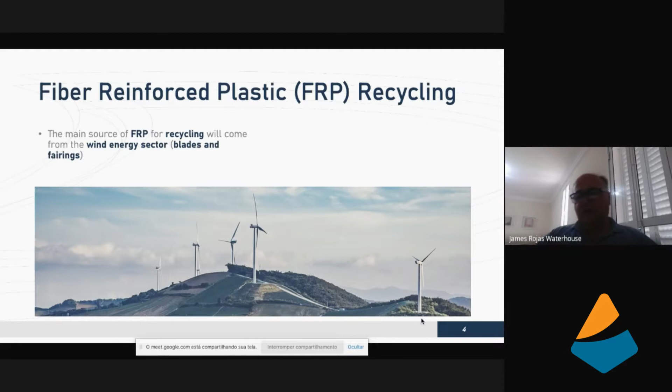The main concentrated source of composite materials to be recycled comes from wind energy, especially the blades and the fairings. But what about all the composite materials used in our society, especially on new aircraft? Well, the aircraft are pretty new, so they don't need to be recycled yet. All the other composite uses come from several thousands of products spread around, and they're not concentrated. Most of our society does not have a way to segregate composite materials to be recycled. So if you have a few kilos of composites, that's not commercially viable to recycle.

So most of our composite components go into domestic or industrial garbage and go to the landfill at this moment. That's quite a shame, but anyway, there's a great future for that. For wind generators, things are quite different, because the wind generator's lifespan is less than 20 years. We expect 20 years of life, but most wind generators do not reach the actual 20 years lifespan, mainly because of early blade failures, etc. But we can consider a 20 year lifespan.

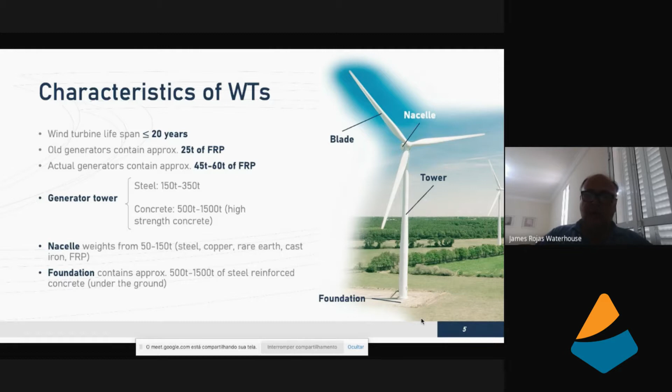So what does that mean? That means after some time, we need to decommission the whole thing. We just cannot leave the wind generator after 20 years just as it is, because it imposes a high risk for society, because it will eventually fall down and create a huge risk for human life or animal lives all around. So you need to disassemble it.

And to disassemble it, you need a huge crane capable of 90 meters height or maybe more, and with a huge capacity. A crane like that, if used for the whole wind farm decommission, you can share the fixed cost of the crane between all the machines that need to be decommissioned. That means around $10,000 up to $30,000 if you are using it for a whole farm.

If you need to decommission in isolation, then there will be a huge cost, because a crane like that needs around 10 days, using like 15 trucks and 10 people just to be assembled. It's an enormous cost. So just getting the wind generator down is a labor-intensive activity, and also a respectable risk activity, because it weighs a lot and you have a lot of risks for human life all around.

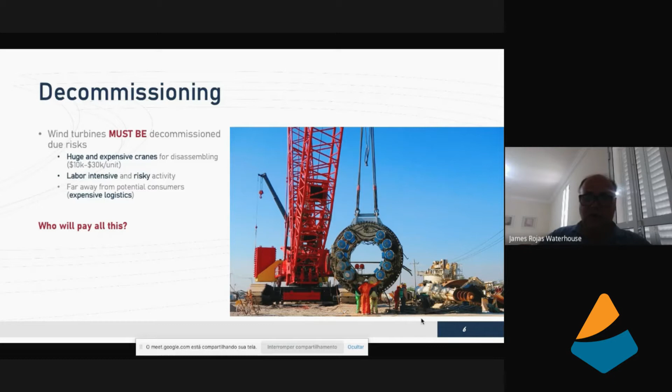For the new contracts, most of the countries are requesting from the investors a warranty to decommission the whole thing. But just for the new contracts; for old contracts, most of the machines are not covered. So there will be problems around. And how can we recover part of this cost of decommissioning the whole machine? Well, we can try to recycle the materials the wind generator contains.

So we can sell the steel for around 15 cents of a dollar per kilo. That means between 20 up to $50,000 for the tower itself, plus between 7 and 20,000 for the nacelle itself. That means we have around 27 up to $70,000 of recovered money. That's not even close to paying the whole expenses for decommissioning the whole thing.

Just because we have the concrete. If we don't have a concrete tower, we sure have a concrete foundation. For the tower itself, which has a bit lower cost, we're gonna have a huge problem, because the tower is composed of high-strength concrete. And trying to break down high-strength concrete into small pieces requires a quite powerful hydraulic jaw fragmenter that's not very cheap to operate. So the whole thing costs around $30 per ton just to fragment it,

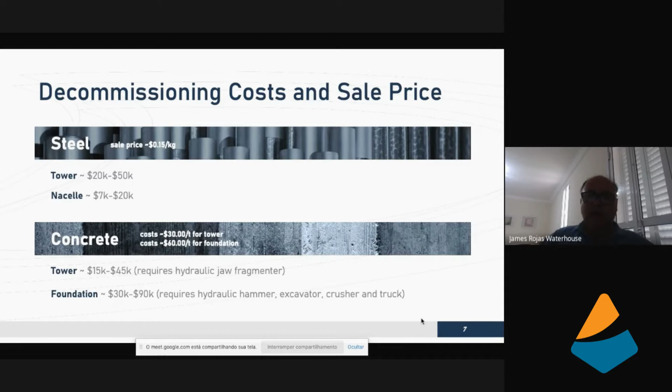And what's gonna happen with the composite materials, mainly the blade materials? This could be a game changer for the whole thing. Now, what they are doing with it is putting it into a shredder to fragment it into small pieces, just because composite materials are very light.

So it's light. If I do not fragment it into small pieces, the logistic cost will be much more expensive than the actual cost. That's still expensive. So you need to improve the density.

And the default use right now is just a landfill that will cost you around $20 per ton. It depends on each country; each region has different landfill costs. But this is not the way to do things for the future generation, just to bury the problem.

And also, most of the landfills are hundreds and hundreds of kilometers away from the blades. So the logistics costs, again, are gonna be very expensive. So in Europe, where the problem is happening right now, just because Europe was the first part of the world starting with wind generators, they are using a lot of composite to fuel cement furnaces.

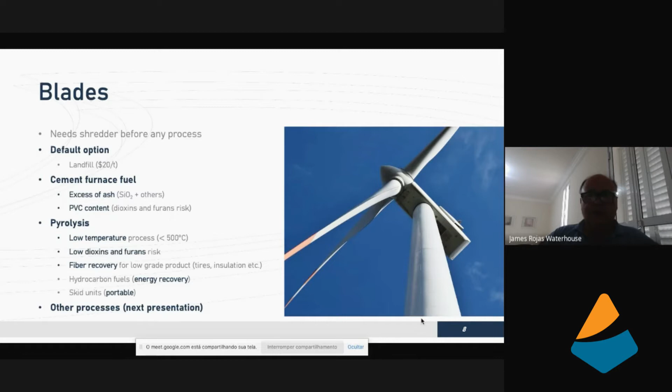And then we have other processes I won't talk about, just because Vanessa will focus on those processes. And this is more or less what I have prepared for you, just because I have only 20 minutes.

I'm going to talk about PHYre, a new recycling technology for the recycling of carbon fiber reinforced plastics. And I'm going to start by talking about Extracthive, because Extracthive is a French SME dedicated to the circular economy. We are mainly specialized in the production of secondary raw materials, and we decided to specialize in this production mainly because we can decrease the risk of supply of this material in Europe. We can give a material with a low carbon footprint, which is especially interesting for local production and local sourcing, and also the affordability of this second-life material, because we have a low price and wastes that can be sourced easily.

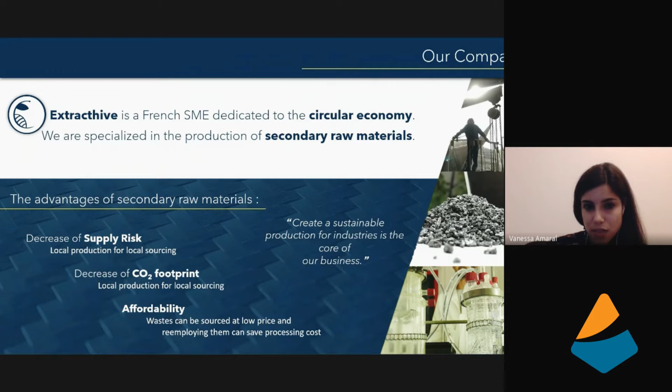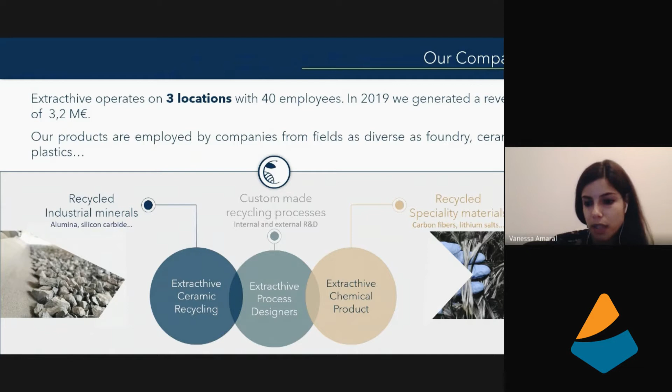So to get into the subject of today's webinar, I'm going to start talking a little bit about life cycle analysis. Today, especially in Europe, there is a lot of legislation and regulation limiting the CO2 that can be emitted by cars and all transportation. For example, if we have a car that is 30% lighter, we have a reduction of 50 tons of carbon per ton of carbon fiber in 10 years. If you consider aircraft, if they are 20% lighter, you're going to have a reduction of 1,400 tons of carbon per ton of carbon fiber in 10 years. So it's a huge decrease in emissions, and it's very interesting to lighten transport. However, the production of carbon fibers is very energy-intensive and can emit up to 80 tons of carbon per ton of carbon fiber produced, which is huge.

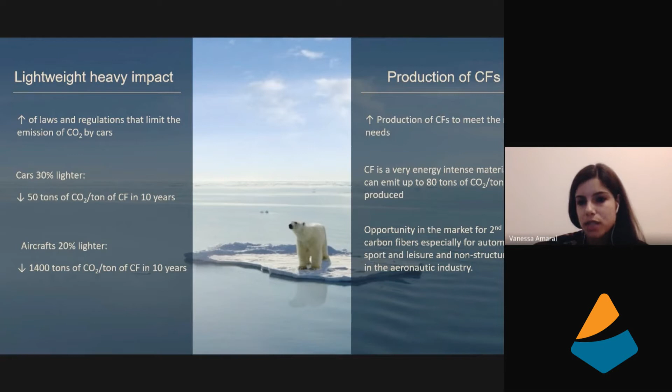However, this production is increasing because the market is in need of this carbon fiber in order to go for lightweight. And all this demand for carbon fibers and all this lightweight that we are looking for does show that there's an opportunity finally for second life carbon fibers, especially for automotive, sport and leisure, and non-structural parts in the aeronautic industry.

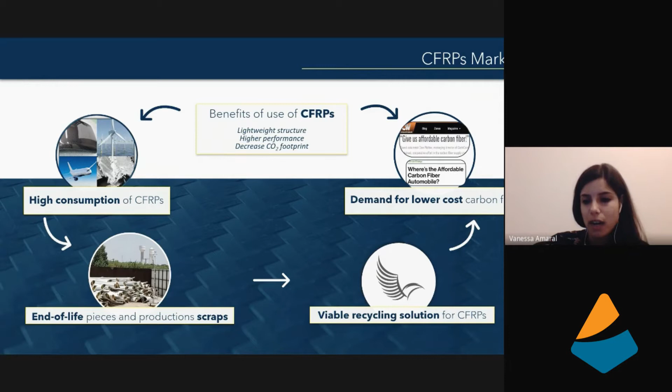So just to resume, we have today a high consumption of composite material based on carbon fibers. So we have a lot of end-of-life pieces and a lot of production scraps being generated today. We need to find viable recycling solutions in order to answer the need of the market for lower cost carbon fibers, and mainly a carbon fiber that has a lower carbon footprint. So that's how PHYre was born.

Actually, today the main recycling process for this kind of material is pyrolysis, as Professor James just presented. However, pyrolysis does still have quite a high carbon footprint, especially because of the high temperatures that they use, and they can damage the fibers a little bit as well. So we have limited capacity of using this carbon fiber, especially in high value materials afterwards. So the PHYre process was born in order to have a very high quality material without damaging the carbon fibers that can be used in high value applications.

So mainly we're going to collect composite scraps. We're going to put them in a large reactor. We're going to put in a mix of chemical materials that's going to degrade the matrix of this composite material. We're then going to recover the carbon fibers from one side, and recover the oligomers from another side.

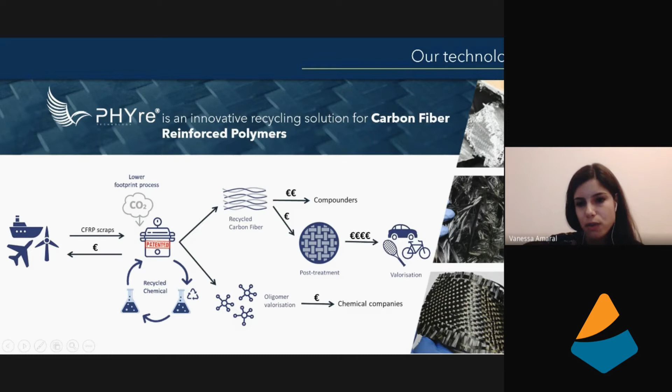So the oligomers are today going to be valorized in chemical companies as a byproduct, and the carbon fibers can then be sent directly to compounders if you want normal valorization of this carbon fiber, where for sure there is a market for this recycled carbon fiber, or we can go for different ways of post-processing in order to go for high value added applications. So I'm just going to show a little video where we can understand a little bit more about the process.

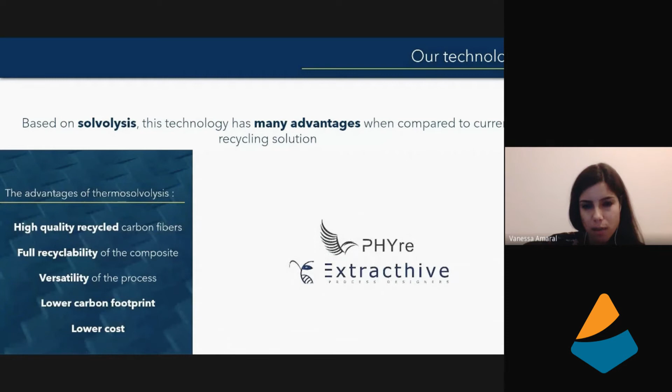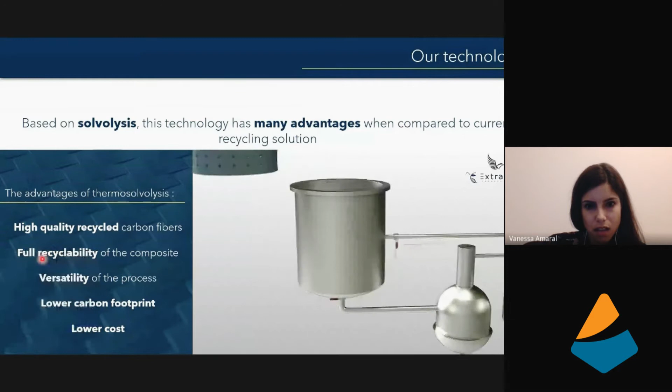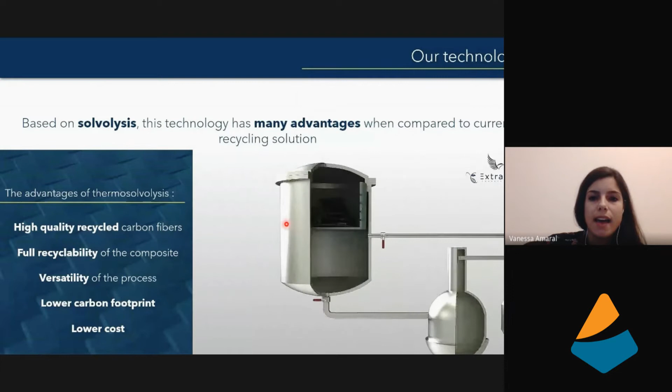So this is the reactor that I told you about. So in this reactor, we actually have a basket. We are going to introduce the composite material inside this basket that's going to then be introduced inside the reactor. We're then going to add the mix of chemicals. We actually have a solvent and a catalyst.

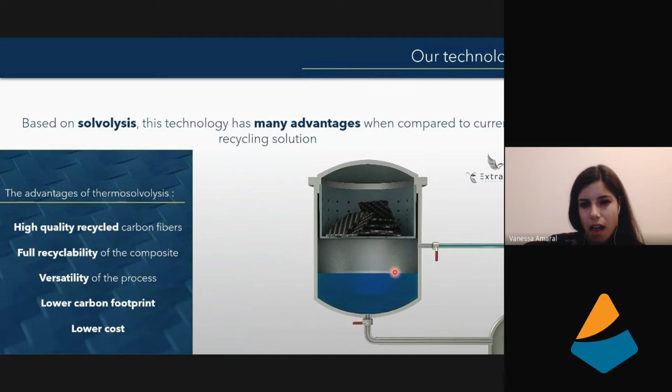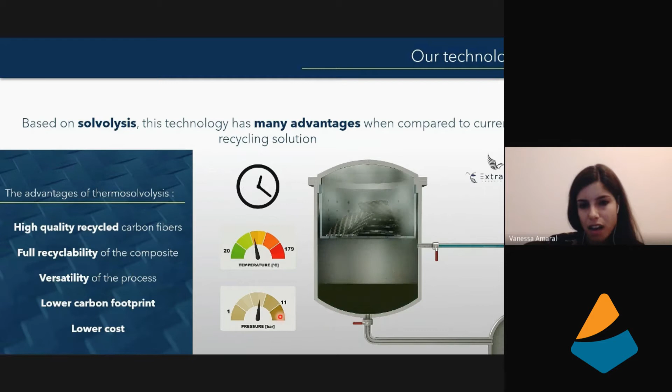We're going to heat it up to 180 degrees. And actually at this temperature, the chemicals are in vapor phase. So here we have a pressure that is around 10, 11 bars, which is the auto-generated pressure of these chemicals. That's going to actually degrade the matrix. So after the solvolysis process, we're going to recover the solvent, the catalyst, and the oligomers of the degraded resin.

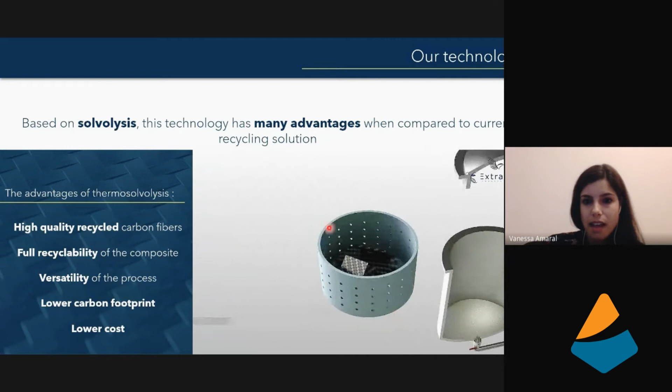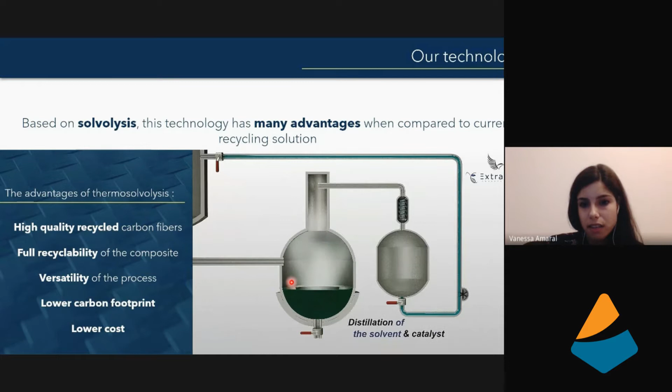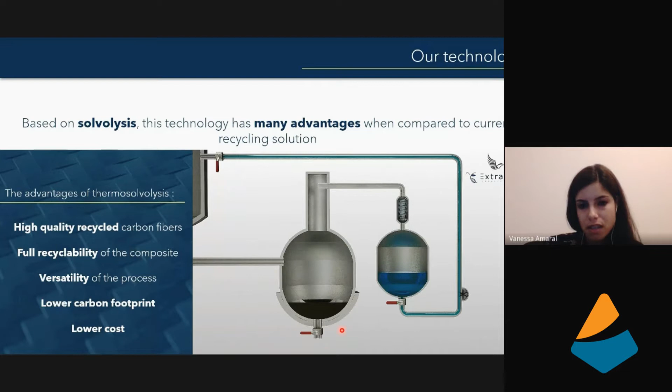And in the basket, we're going to have these carbon fibers that are ready for the washing steps to be valorized. The chemicals are then going to be distilled. So it's just a simple process of distillation where we can recover the solvent and the catalyst for a new use, so they don't need to be disposed of. And through this distillation step, we can recover the oligomers that are then going to be sold as a byproduct for the chemical industries.

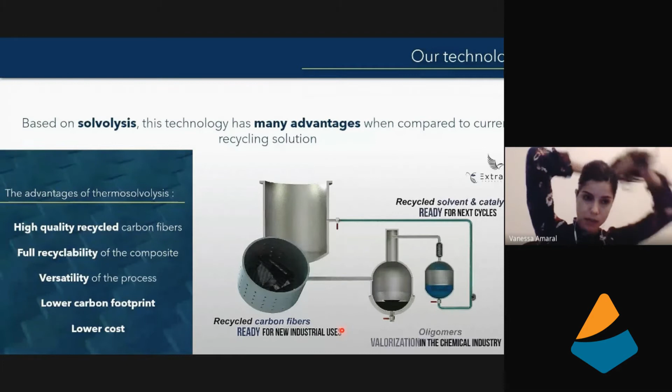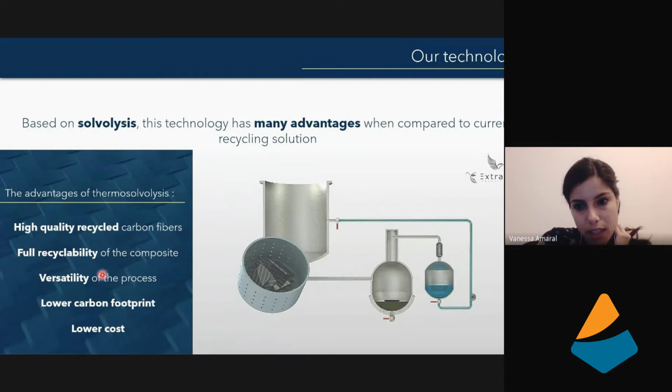So this process has the advantage of not damaging the fiber, so we can recover really high quality material. We have the full recyclability of the composite material, which means we can recover the carbon fibers, but the oligomers as well. And it's quite a versatile process. I'm going to show you later what kind of matrices it can degrade. We have a lower carbon footprint as we work at lower temperatures and the chemicals are reused, and it's also a process that has a lower cost.

So continuing, as the process itself is quite static, if the material is still woven, we can recover the still woven material after the recycling, which can be interesting, especially for applications in the sport and leisure industries. Or we can recover long fibers that can then be processed into yarns for higher value applications.

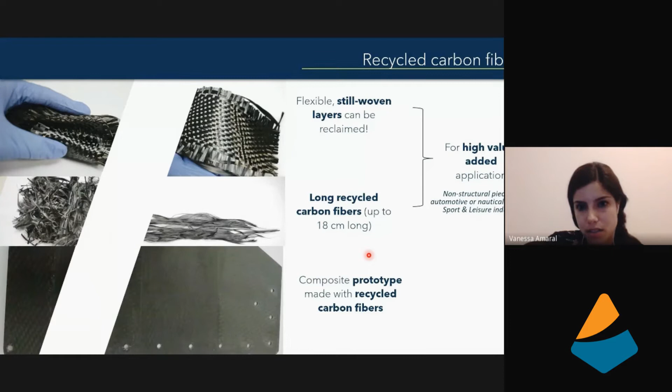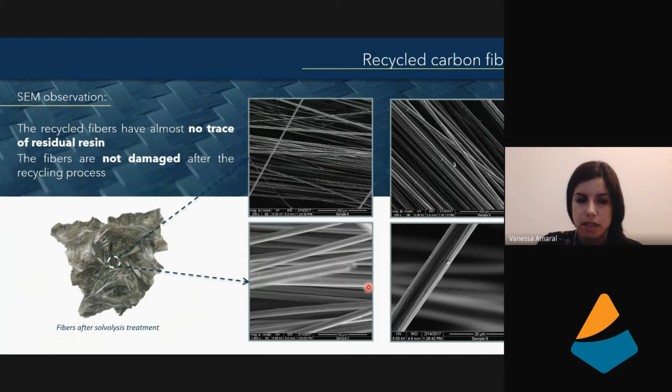And we put as well these virgin carbon fibers and recycled carbon fibers inside composite material, and we have done some mechanical properties tests where we don't see any significant difference between the recycled fibers and the virgin fibers once they are inside the composite.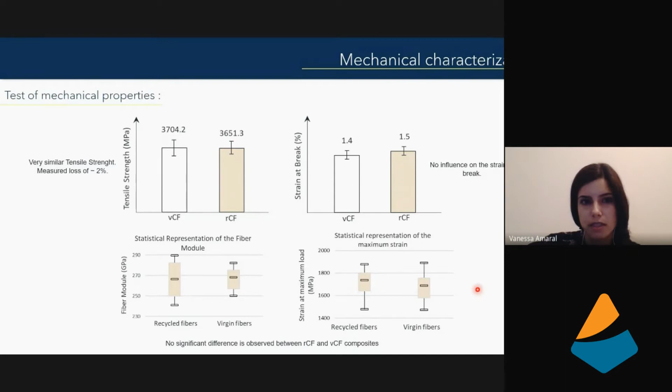So here's the versatility of the process. Actually, what happens is that the chemicals are going to cleave the carbon-nitrogen or carbon-oxygen bonds in the matrix. So the process works very well. It's very compatible with epoxy resins, cyanate ester, polyamide, PPA, PEI, vinyl ester, PEKK, and other types of resin, thermoplastic and thermoset resins. Using PEEK and PPS, we have to change the conditions a little bit, but we can still have

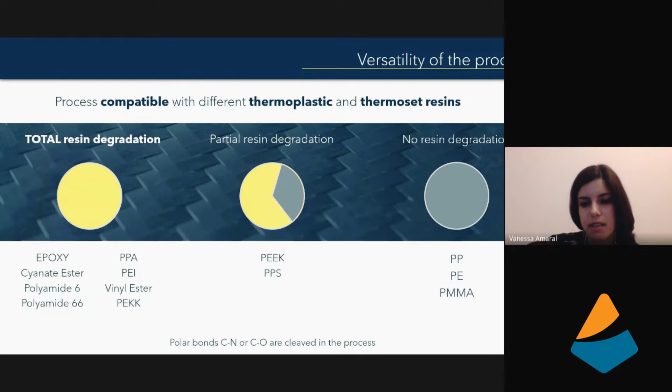good resin degradation. However, because of how the process cleaves the bonds, it's not compatible at all with PP, PE, and PMMA. However, we do have a large part of the market, especially regarding the epoxy resins, that can be well degraded in our process.

And what happens with the oligomers? So here we can see a textbook example of how we can valorize these oligomers as a byproduct. Here is a case of polyamide 6. In order to avoid any contamination from the sizing of the carbon fibers, we used in this case only pellets of pure polyamide. We put it in the solvolysis, and then we recover this white powder.

We then analyze this white powder using different techniques. And what we show is that it's actually mainly a precursor of caprolactam. And caprolactam is actually the monomer of polyamide 6. So this caprolactam can be directly sold to the chemical industries to redo polyamide.

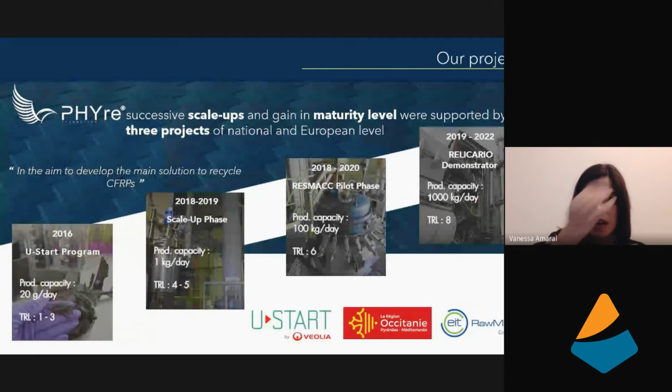So this technology was actually created five years ago in 2016 through a European program called U-Start. We then scaled up this process to 1 kilogram per day in order to optimize the system and especially the solvent recycling. We have since then acquired different kinds of national and European funding in order to scale up the technology. So today we are in our pilot phase where we can treat around 100 kilograms of composite

material per day. And today we are already starting to buy all the equipment for the big demonstrator that's going to be treating 1,000 kilograms of composite material per day and should be installed in 2022.

So here is our 800-liter pilot. We mainly use it to treat representative samples of composite material, as we can put around 100 kilograms, which is quite representative. We want to work on different kinds of realignment of this recycled carbon fiber and test different kinds of post-processing in order to have a product that is more homogeneous to sell in the market.

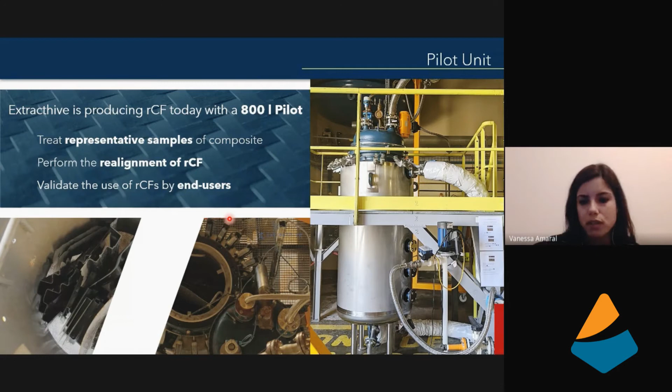And as well, we want to provide this recycled carbon fiber to end users in order to validate our material before we start the commercialization. So there are different opportunities in this recycling. We usually only think that the recycled carbon fibers can be valorized for compounding, but not only.

So here is the case where we are going to recycle a hydrogen tank. For those that don't know, the hydrogen tank is mainly made of carbon fibers. This one is with epoxy resin. And we have put this in our 800-liter reactor. We have put the chemicals. We wait for the time.

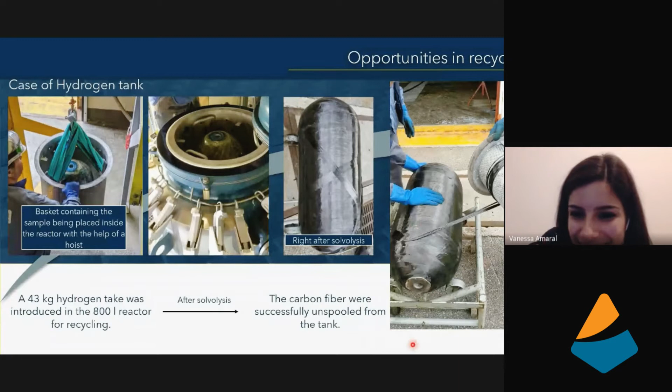And the video is not working. Well, it's a shame. Maybe it's because of the pointer, Vanessa. Could be that you are the pointer. Okay. So I'll try to remove it.

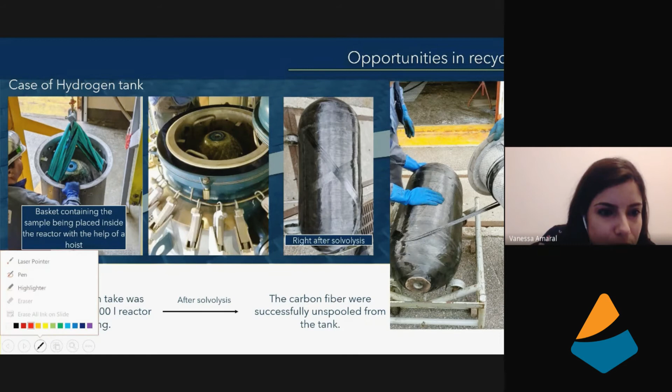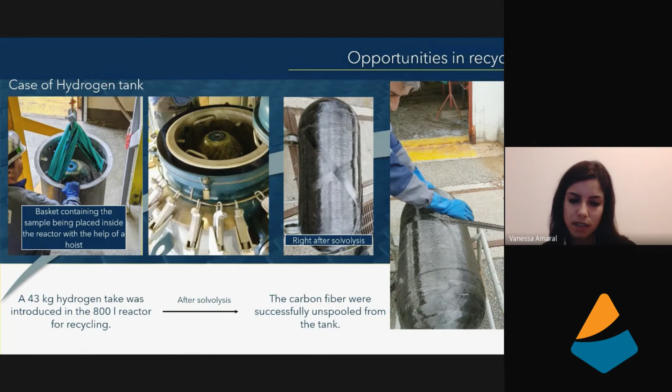Okay. So yes, in this case, we can actually unspool the carbon fiber from the tank, and we can recover almost a semi-continuous fiber, because in this case we have 4 kilometers of carbon fibers. So it's a very high quality carbon fiber that can have different uses once it's recovered. So there's a lot of market opportunity for this second life carbon fiber.

Our goal is to work on semi-finished products in order to provide more homogeneous quality, which is required especially for the automotive industry. We can imagine doing unidirectional tapes or sheets where we can maximize the mechanical properties.

Of course, we can always go for nonwoven mat, which is easy to use and to be employed by the end users. And we are also working in our collaborative projects on producing a kind of yarn that can be used as well by the end users.

These carbon fibers, recycled carbon fibers, can be used for pieces in the automotive industry. So here is a piece that was done for one of our partners, that's Meyer company. We have as well done these prototypes that are used in non-structural pieces for the aeronautic industry. We can imagine something similar as well for the nautic industry.

And of course, sport and leisure would be the most simple and also a niche market where we can easily use these recycled carbon fibers in skis, in bike frames, rackets, and many other endless applications.

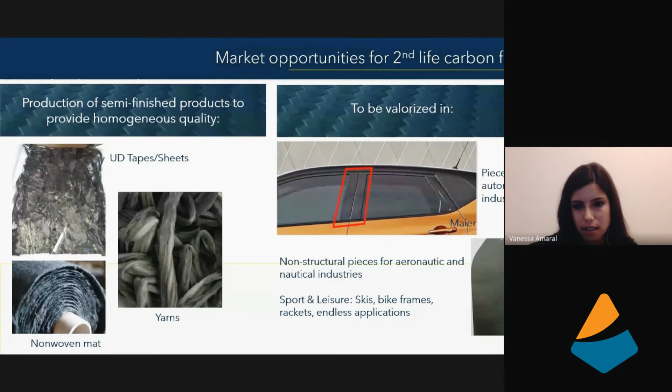So now, today, we are focused on our Relicario project. It's a project that is funded by the EIT Raw Materials in Europe. It's a project that is ongoing and is going to end by December 2022. And the goal of this big project is actually to prove the competitiveness of this thermosolvolysis recycling process. The goal is to increase the level of maturity to TRL 8.

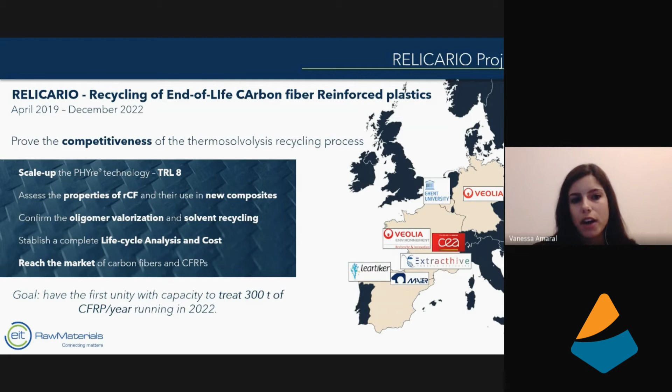And we're going to assess all the properties of recycled carbon fiber in new composite material. We're going to confirm that we can indeed valorize the oligomers and the recycling of the solvent. We want to establish a complete life cycle analysis and cost in order to show the competitiveness of the process among all the other recycling processes that we have today. And finally, to reach the market of recycled carbon fibers.

So mainly to finish my presentation, we have shown that the technology has been shown to be a promising technology for the recycling of composite material. We have validated it at laboratory scale, scale-up phase, and now in pilot scale as well. We have the possibility to sell loose fibers, but we can sell as well nonwoven material, and even semi-continuous fibers when we are recycling, for example, hydrogen tanks, as I just showed, which can definitely open new market alternatives for recycled carbon fiber.

The beginning of this process industrialization will start by 2022, and the first unit is going to be able to recycle around 300 tons of composite material per year. So this is just a small timeline to show where we were in 2016 with really the beginning. We put the first patent in 2018. The scale-up experiments started as well in 2018.

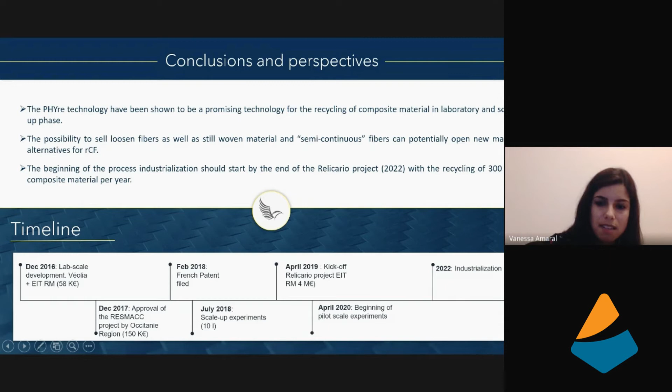We have secured the funding of the EIT Raw Materials of 4 million euros in 2019. In 2020, we began the pilot scale experiments, and finally now we are preparing everything to start the industrialization in 2022. Thank you very much, and I'm open to questions.